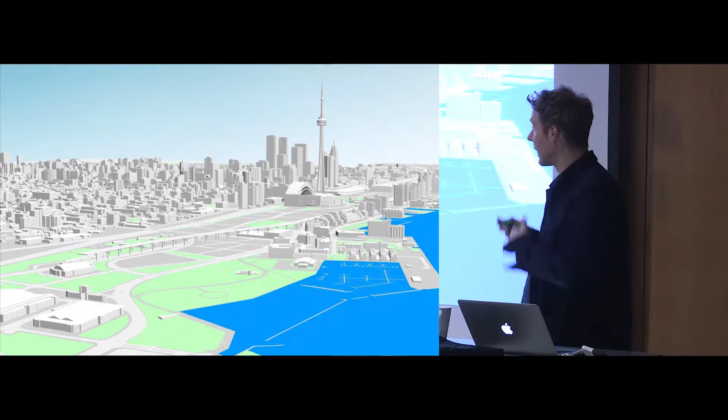In the last 20 years, we've seen the city move from a state that looked like this to a state that's more like this. And that's happened surprisingly fast. I never get tired of seeing that transformation. If you don't get to visit the city on a regular basis, it feels like that kind of shock sometimes.

So the question for someone interested in the public realm is to actually take stock of the city as it is today, now that we've achieved a relative verticality, and actually start to focus on the things just beyond this view - the incredible natural heritage and resource that is woven into the city fabric - and to start to really think about this idea of a city as a landscape, and what that means to recover that, or make connections to it at different scales.

That has been the kind of mission of Public Work. I'm going to go through a number of projects. The first one is actually one of our longest running projects in the office. It's still unbuilt, but it was our first project in 2012. It's at the mouth of Garrison Creek in Toronto. It is ready for tender, so I'm excited that one day it will be constructed.

On the left, you see this site at the shoreline of Lake Ontario and the mouth of Garrison Creek, right next to Fort York, about 300 or 200 years ago. On the right, you see the site as it is today, now with landfill moving about 400 meters from the lakefront. The site has this incredible sense of time, backwards and forwards, as it straddles a landscape that was on the left and the landscape that is emerging with the construction of condos in the City Place neighborhood.

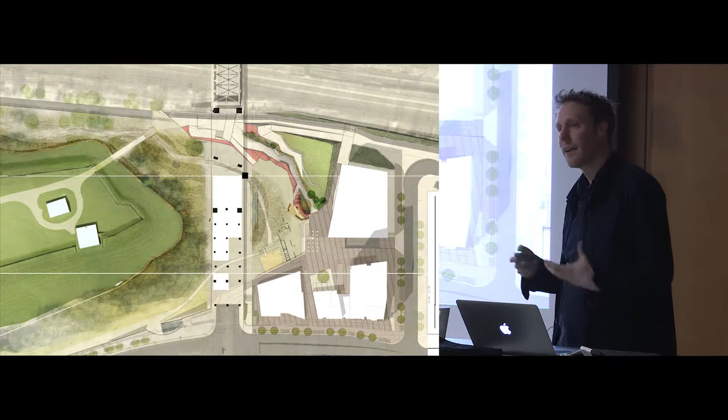But at this moment, in this public space, capturing the eastern side of Fort York, we put forward the idea of almost reestablishing the artifact of this geomorphological figure, taking quite seriously this sketch from Elizabeth Simcoe about that promontory embankment, and exploring new, ancient construction techniques in landscape and earth building — techniques that amidst the steel and glass of this condo development and vertical community, we lose touch with, a more tactile, earthen sense of the landscape.

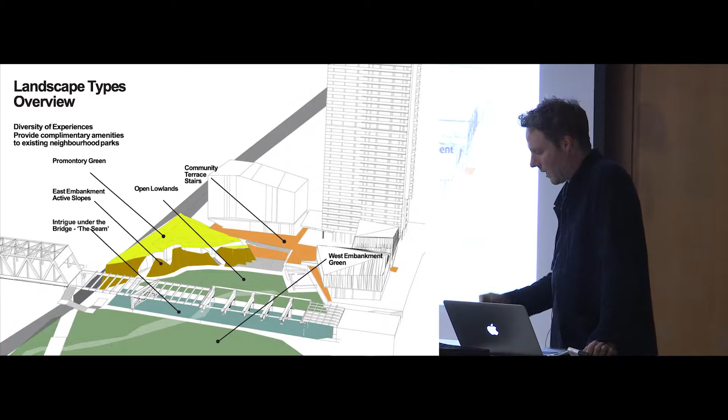So we're proposing a use of rammed earth, really trying to recover some of the textures of this creek ecology, and use stormwater management techniques in the lowlands area to reestablish that creek-like texture and atmosphere. This is a diagram of the site, showing the division of a lowlands, a middle cliff-like edge, and then a highland and promontory green on top that would offer unparalleled perspectives of the district.

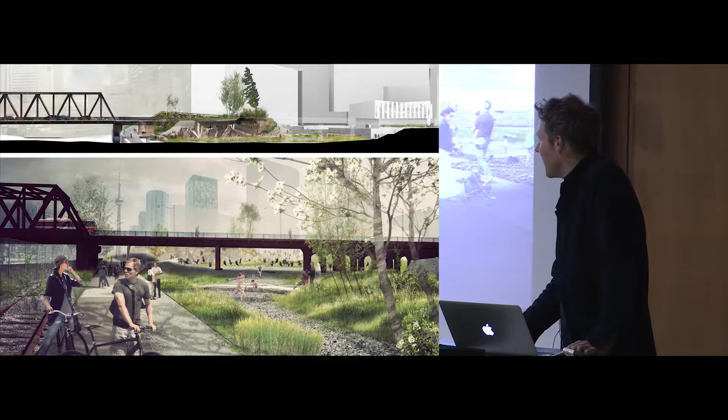Here's one of the images showing how the passage from the trails along the rail bank could allow the underside of the Bathurst Viaduct to become more hospitable, increasing the porosity between both sides of the fort. Ultimately this culminates in the upper green, giving a prospect over Bathurst back to the fort — creating a dialogue between this location, one of the reasons the fort was established here, and the fort and the remains of its heritage.

In 2013, we got involved with the University of Toronto faculty, the Daniels Faculty of Architecture, Landscape, and Design.

They were planning a move of the faculty to 1 Spadina Crescent, the former Knox College — a flat, circular roundabout space with this incredible jewel of a historic 19th century building. This building had been abandoned and disused for a number of years, but had gone through many progressions of uses. The idea was to reestablish all faculties, including the School of Visual Arts, in this new building, and the architects were Nader Tehrani's firm, NADAAA.

Situating that Spadina Circle in the historic context of Toronto's fabric, it's really one of the few exceptions to the rule of the grid — a very interesting break in that morphology of the city. That and Queen's Park are the two really poignant ones.

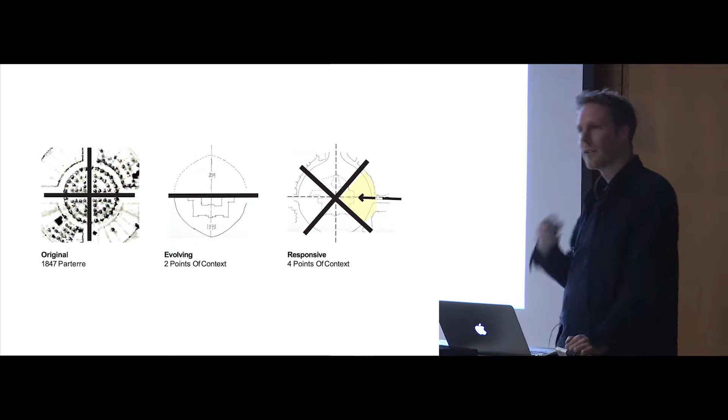We looked at the evolution of that site, originally as a landscape in the mid 19th century before the construction of Knox College, with this very axial break of the parterres, and how it emerged through deterioration into a single-sided orientation.

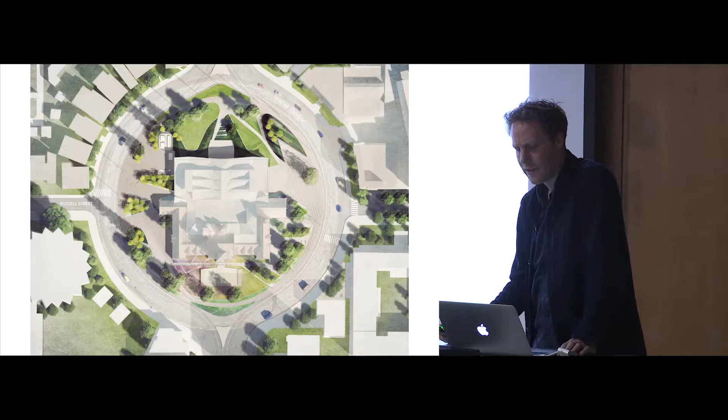The idea of the building and the situation of the new extension was to allow that to be more responsive in four directions. So this was the plan, which has been really interesting to see evolve — from an illustrative plan through the detailing, and now this aerial image showing the strong figure of these islands that galvanize around the old historic building, break through the transitions, and reestablish with more topography towards the north. So here's the sort of figure.

This is the eastern side of the project, which is actually the front door, oriented to Russell Street, one of the key axis spines towards the center of U of T. Opening a front door to the east, a gateway to the campus in that direction, was key. That's also the location of the plaza and the focal point of gathering, without giving up on the more neighborhood-focused entrance on the other side of Russell, the formal historic south, and the more dramatic and contemporary northern facade.

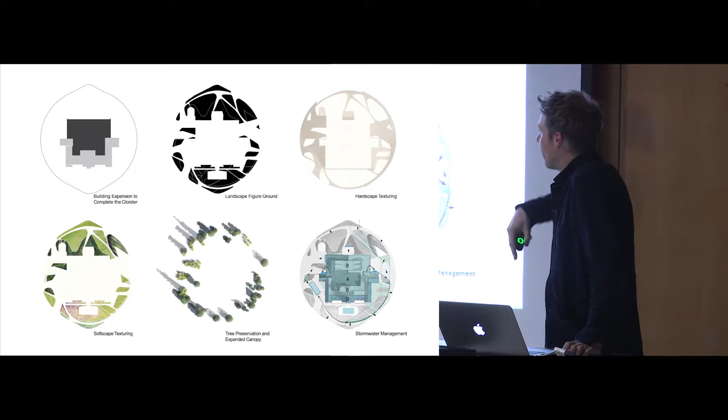So each axis has its own personality, respectful of the heritage, but also evolving around this circle, because the circle is always seen in movement, which is really the dynamic aspect of it. And that figure ground we establish with these parterres is heavily influenced by topography.

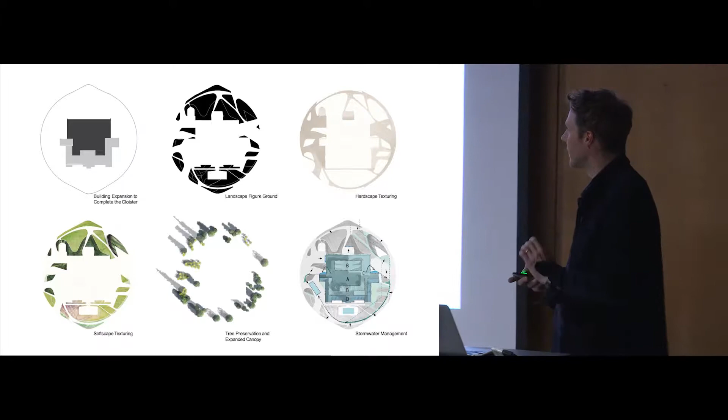That south view now presents itself very formally with native grasses, this idea of reintroducing nature into the city but in a respectful way, tuned to the pastoral moment and these quiet contemplative moments. The preservation of heritage trees was really critical, and then bringing in this influx of new textures in planting.

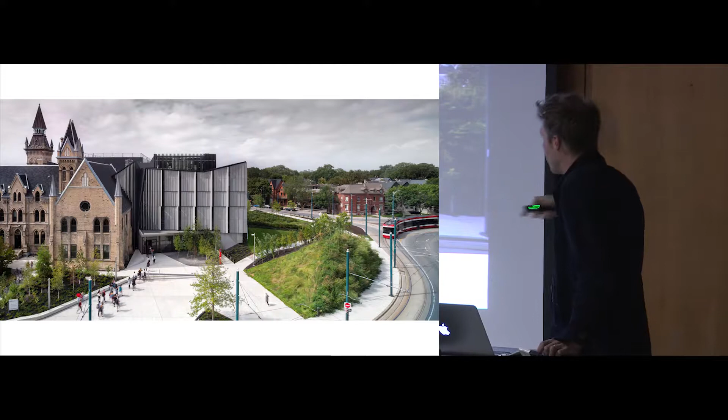As you weave around the circle, so to speak, you come to that entry court, and then the introduction of much more inflected topography, reaching a climax as you come around this moment where the streetcar comes, and the most dramatic landform almost sets itself off with the edge of the most dramatic point of the building.

We call this landform Darwin's Hill. It's almost an exception to the rule of these very sculpted and tailored landforms in a very controlled building, in a spirit of almost letting the landscape loosen up a little bit.

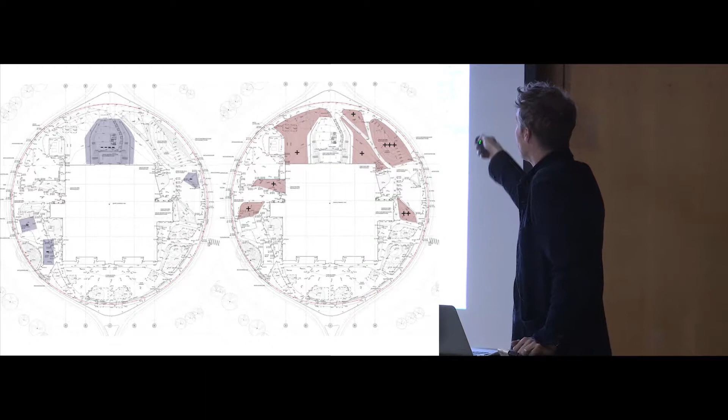This area is actually a very dramatic constructed landform. It's constructed out of the negative soil repository of the cut to create a sunken terrace on the north side, demonstrating this subtraction and then addition — this digging out is a way to start to allow the whole northern part of the circle to take on a much livelier, expressive, and sculptural feel.

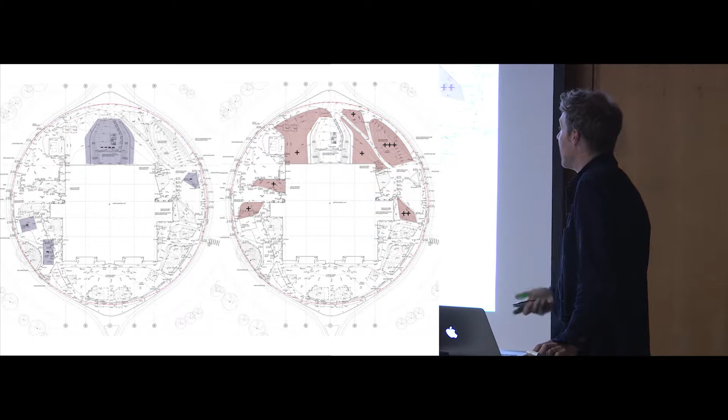That's an interesting action because it starts to make a completely flat landscape feel a little bit bigger than it actually is, in a strange way. It has that perception of becoming a more complex landscape on a relatively small, basically one-acre site.

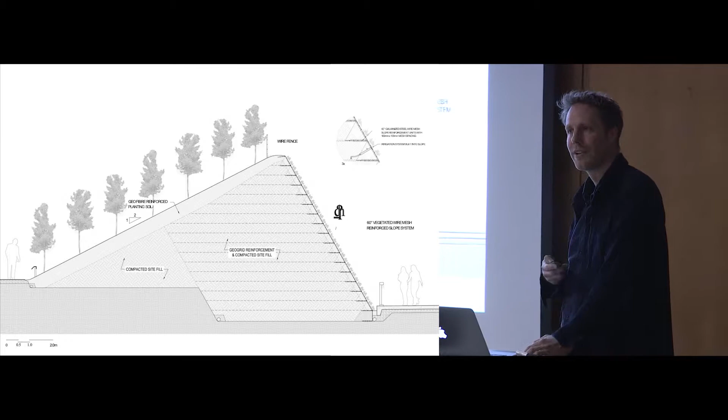The construction of Darwin's Hill was interesting. It also allows a chance to expose different forms of construction as a pedagogical tool — the construction of varied degreed slopes and stabilization methods of forming those slopes, and of course borrowing from mechanically stabilized earth techniques common more in engineering practices, to allow those to be visible.

That's the construction of the layering of this 5.5 meter high landform. You start to see in construction that south-facing slope that would face the plaza become the lawn, the sun lawn.

And on each side of this landform, we were able to set forward the beginnings of some pedagogical experiments in landscape that the faculty would be involved in being custodians of. The first one was simply a taxonomy of the City of Toronto's native and approved trees for naturalization.

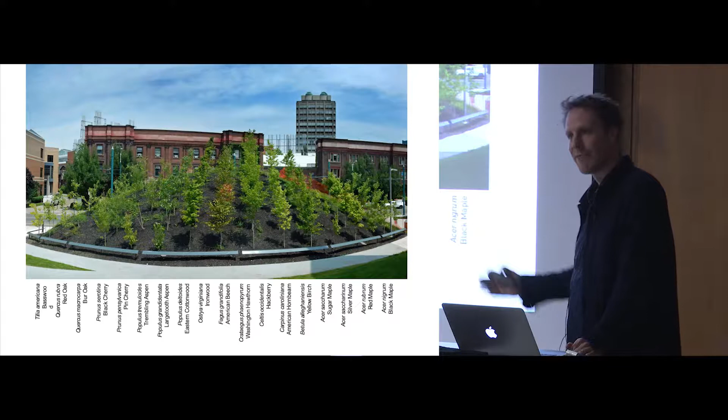So that's A to Q of trees, and they face the studios — interesting for landscape students to be surrounded by this. Your campus becomes much more lush. The U of T campus, very central in the city, landscape students don't have the same access to actually looking at trees in the same way, to see them through their growth, their various periods of growth. It's nice to think of a student who might spend three years at the faculty, able to observe these various species in different moments, following their form and habit as they go.

And then the south side is really the lawn, which we've been experimenting with mowing and not mowing.

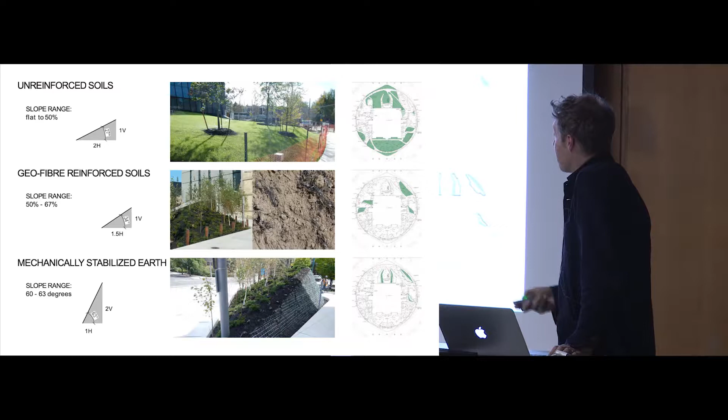And the kind of regime is being established for how that maintenance practice will take on. We've had a lot of fun thinking about how this landscape is maintained, especially at Darwin's Hill, allowing natural processes to unfold a little more openly, without the strict maintenance practices of the university. Across the site, you can see various methods of reinforcing soils at different slopes.

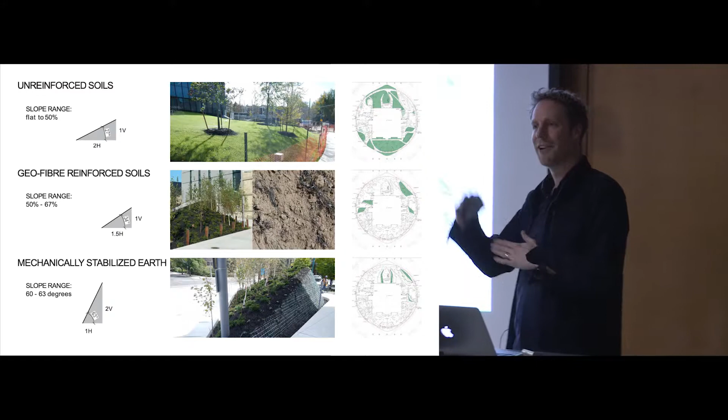Slopes are designed in very clear and concise ways, so there's a kind of tour you can take around the circle, catching about every standard slope you need. If you're working on a project, you can see a 3-to-1, a 2-to-1, a 1.5-to-1, a 1-to-1 — sometimes a nice measure to really understand spatial conditions.

Actually, we were doing some tests seeding some stock of Vinca, just to see how they would take. We were doing some bare root plantings and various tests that were interesting, to see what densities we could establish on these steep, mechanically stabilized slopes.

Here's moving around again to the west entrance. This is more the community side, the library, and the more contemplative side. This is where yews and birches become filter landscapes on either entrance.

The scoring of the concrete — because of the budget, the paving was really poured-in-place concrete, but to give it more life and quality, so it didn't feel like the rest of the concrete city that surrounds it, we employed a scoring technique inspired by some of Sol LeWitt's drawings — this kind of etched, very careful overlapping line work.

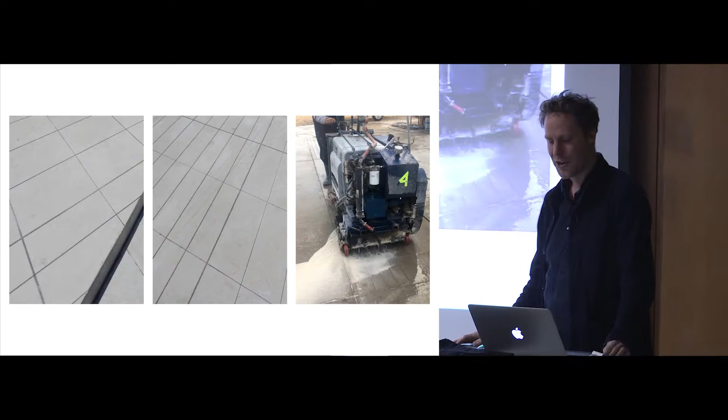And we discovered that amazingly, in Guelph, Ontario, there's a North American leader in scoring, but this technique isn't usually employed in public space projects. It's usually used for barns — it helps prevent cattle from slipping.

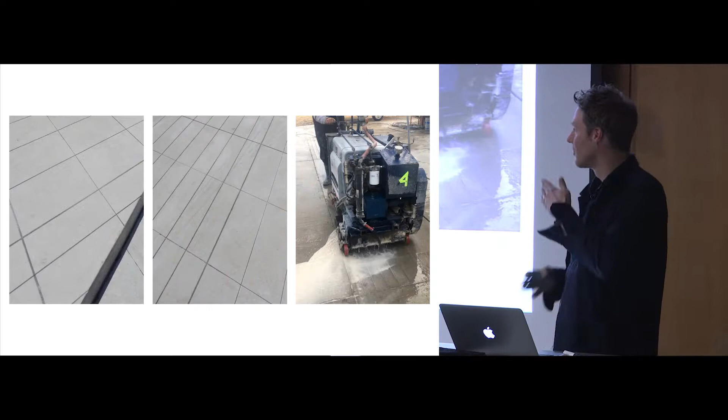So an amazing guy named Vern, who is in high demand on Texas ranches, came to U of T to do these amazing incisions in conjunction with control joints and expansion joints, creating this kind of varied density across the ground plane.

It reestablishes new relations to its edges, and the landscape continues to evolve. The faculty continues to play a central role in how it's managed and how it will be a source of experimentation going forward.

In 2014, we were really lucky to get involved in a project of very high density — two new office towers by Wilkinson Eyre Architects. And they had the idea of bridging these two towers with a park.

That bridge, or platform, connecting these two projects allowed the project to work in phases — while the first building was built and occupied, the second was a sort of staging ground for building the second one on a very tight plot of land.

But I guess one of the other really strong purposes of the landscape was to redefine what it meant to extend the quality of downtown's office addresses south of the tracks past Union Station. In some ways it was really about how that financial district, which is fairly underserved in terms of green space, would begin to have a green address.

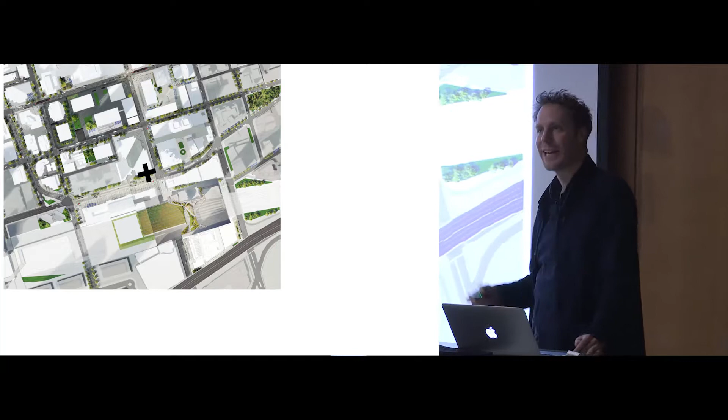And that was really important, I think, because the general center of Toronto's business address has always been King and Bay. And at King and Bay, that's where Mies created one of his iconic TD Towers.

And it's a real question of how you start to move that energy southward, south of Front to this address, and then even further south of the tracks to this address.

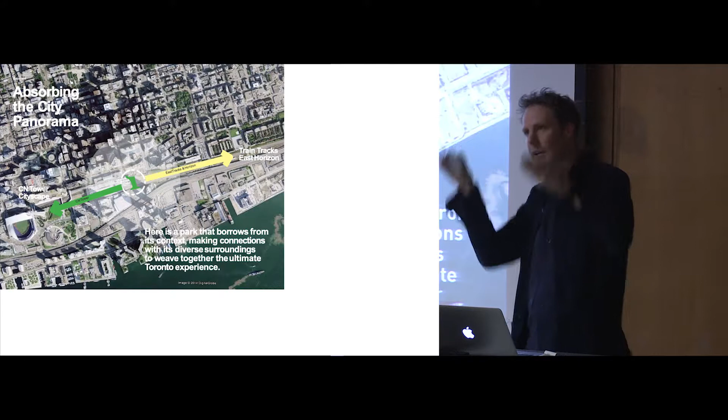Part of the theory, or the principle, or what we started to work with, was to create a kind of corporate environment that would be completely different from that of King and Bay—basically the opposite—and to focus on the disconnect from the ground plane and city level by necessity, because this park was 5 stories above street level. It could actually absorb an unprecedented kind of panorama and access to skyline views, and it could be materialized in a way that was nothing like the granite ground plane of the financial district traditionally.

So as you enter the park, from either vantage point, you meet a garden, and then you're drawn into the central green.

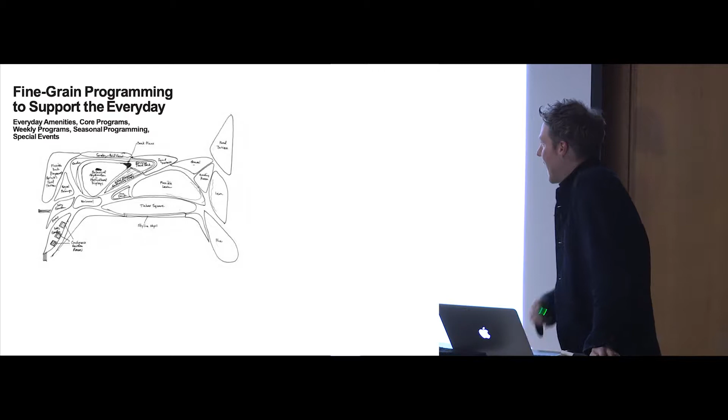Part of that was driven by an idea about a park 5 levels off of the city ground, and what it would mean to activate it, not just for office users, but how it could play a role in more daily life. That's a real challenge at 5 levels above street level.

We worked also with the advisors who work on Bryant Park in New York City, who have become adept at programming public realm spaces. They were part of the discussion and dialogue with the client team about how you create a central zone that could accommodate almost anything, with the ability to keep programming and activating the edges.

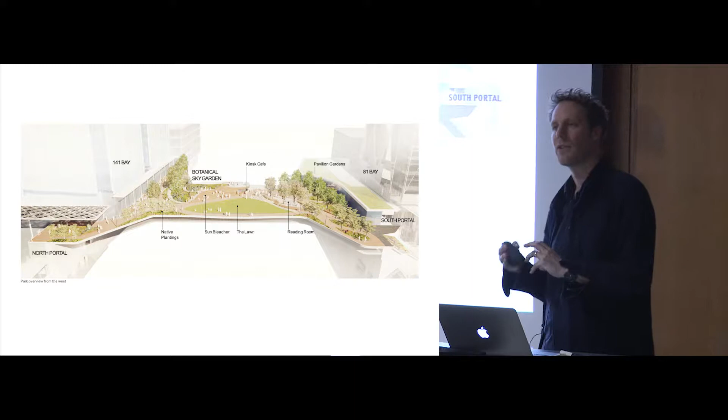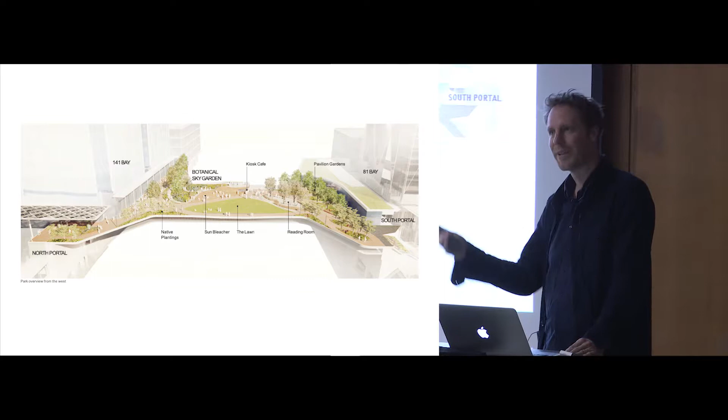What was interesting in the conversation from us as landscape architects was to work at the nuances of those assumptions about flatness being the default for infinite programming, but to actually recognize that a landscape didn't have to deter flexibility in terms of programming—so tree planting didn't have to mean you couldn't still have a farmer's market, or that you couldn't think about animation in an environment that could still have character from the point of view of a landscape.

That meant also really having a lot of discussions about topography, and that placemaking and programming are things that actually have to work together.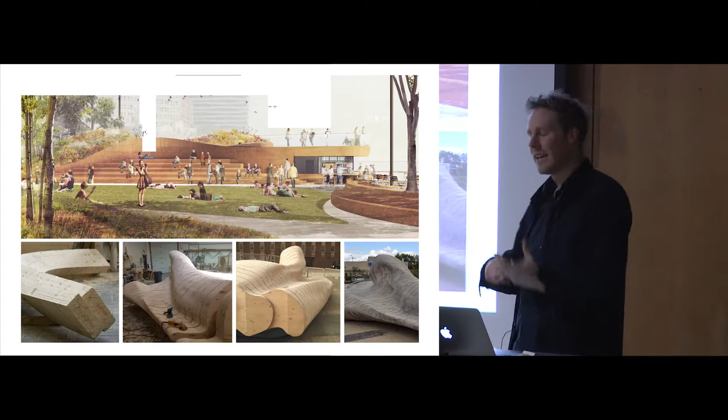The use of wood and timber was really important for us in counteracting the glass and steel nature of so much of this area, letting it feel like a place where you might want to take your shoes off.

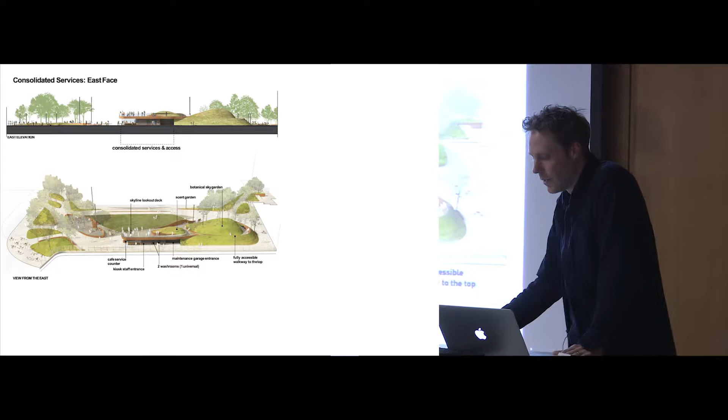And so the sculptural timber detailing of this bleacher that would face the lawn. This bleacher actually started to turn into more than just a landform and a source for the garden—it also became a kind of functional building, and it evolved into this approach to topography.

Underneath this particular hill, the landform has found its raison d'être, from the point of view of the clients, especially by housing a kiosk that could serve food and beverage, washrooms for the park, a mechanical room, storage, and a garage for the Zamboni. I'll get to the skating program in a moment.

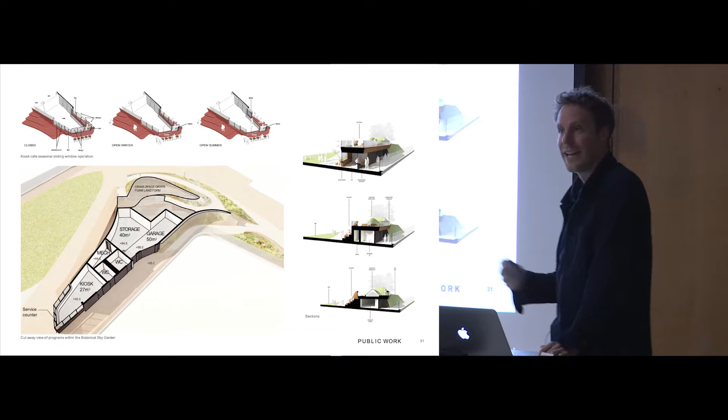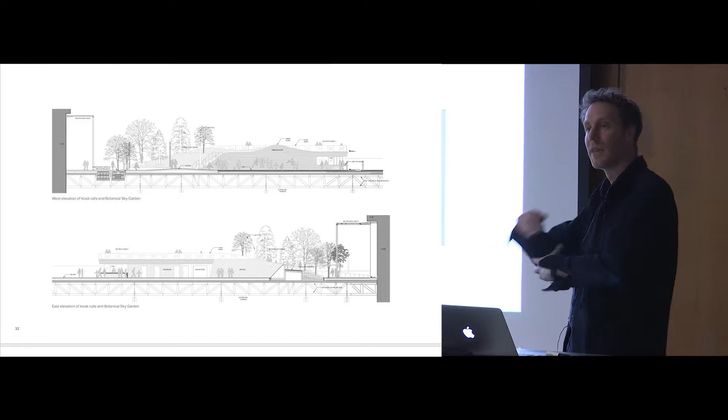Interesting from the point of view of landscape architects working on a park—it evolved into actually designing a landform that eventually became a building. And so that building is almost completely disguised as one of the sweeps of this kind of botanical drift.

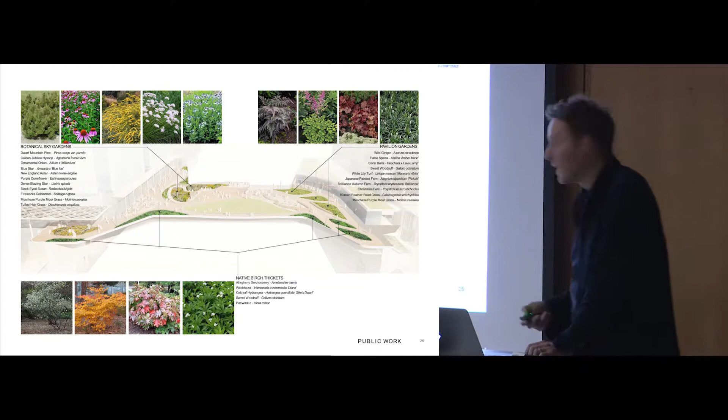In terms of the species mix, we used more deciduous trees with diverse seasonal color framing the transition to the buildings, with thickets of native birch coming around the front. These are ideas about gardens that promote biodiversity and pollination—this image of a sweep of green that moves through the park.

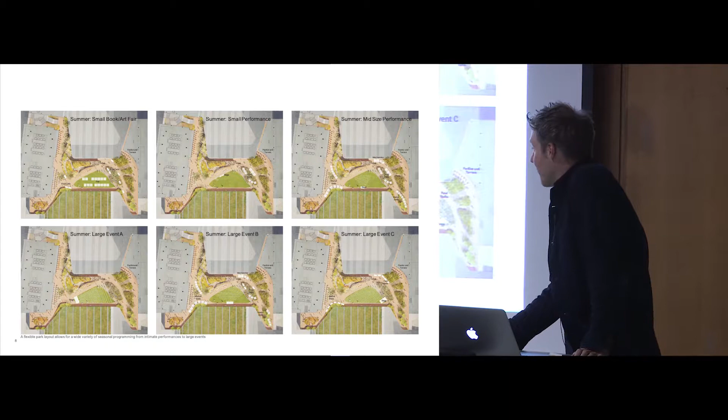So a few more views. And again, that idea of programming—this plan had to be tested for an infinite number of scenarios of how this could be occupied, both by office users and by the programming they anticipated to keep this place pulsing. It's right across from Scotiabank Arena, so they saw it as a place that would have heavy event action.

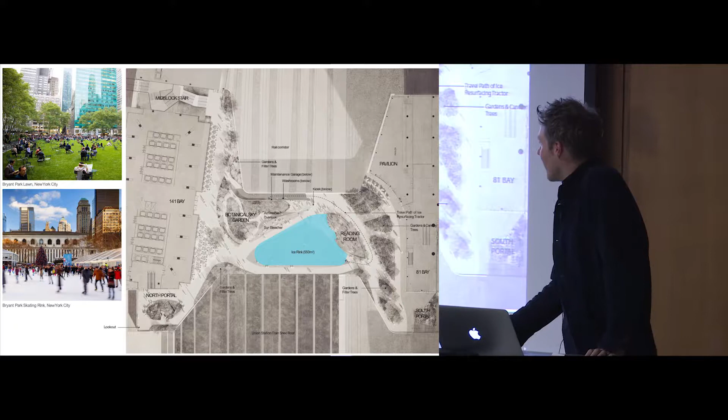And it accommodates an ice rink seasonally at its core, which is another reason for the facility here to store the Zamboni. Okay, I'm going to keep moving to 2015. This was an exciting year.

This was when we had the amazing opportunity to engage in this kind of fantasy about how our remnant infrastructure of the 20th century could take new life in the public realm, which becomes, particularly in Toronto, a hot topic as we reached a certain tipping point in density. There's now a more commonly held understanding of feeling like we're lacking our connection to green space and public space, and it's become central in public discourse. This project's been a great stimulus for that discussion.

We were really thrilled to be invited by urban designer Ken Greenberg to explore what it could mean to think about a public space under this artery. One of the principal ideas was really about working under this roof, but also working with this structure, and that was something really important to us.

Without a doubt, its placement strategically in the midst of 7 neighborhoods that hadn't really galvanized as one. The structure sort of swerves through neighborhoods, some established and extremely historic, others completely new, but housing a huge population of people without really a strong sense of a community gathering place.

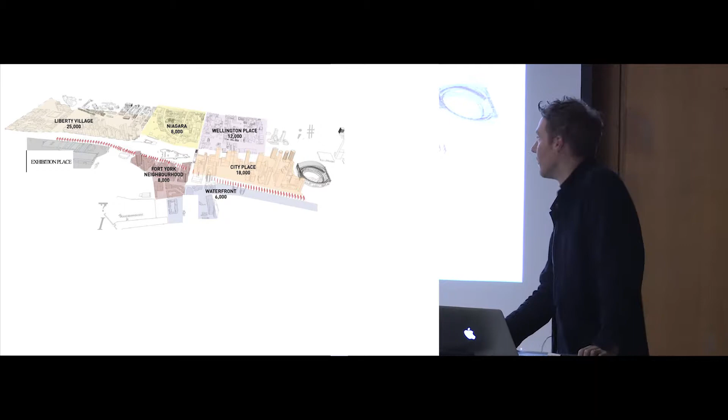So it began through an idea of connectivity, but it evolved to an idea of place and a particular kind of activation very different from the traditional parks of the city, that could be an antidote to supplement the traditional spaces you might have in various parts, whether it's a historic commons of the fort, the more traditional community parks, or the waterfront parks that have been emerging.

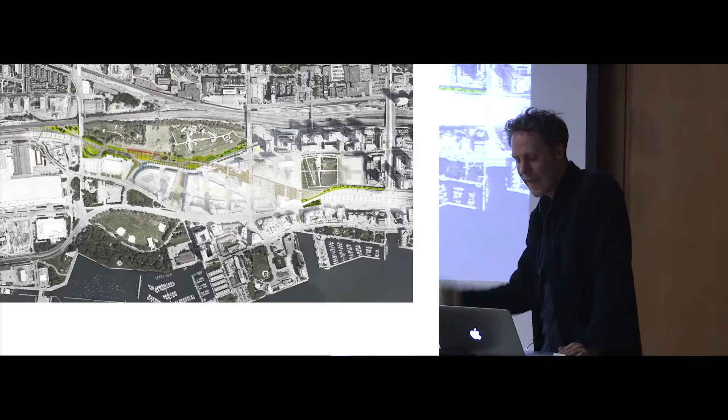The Bentway became an idea about an alternate kind of space that was really more about expressing a kind of creative arts and the diversity of culture that Toronto doesn't always have a home for.

In looking at this space, it's one of those spaces where its rawness is what makes you fall in love with it. These amazing shots of it under construction reveal its kind of anatomy of these columns, which are called bents as an engineering term. Immediately from this view, you almost get a sense of that anatomy, and the idea of rooms emerged.

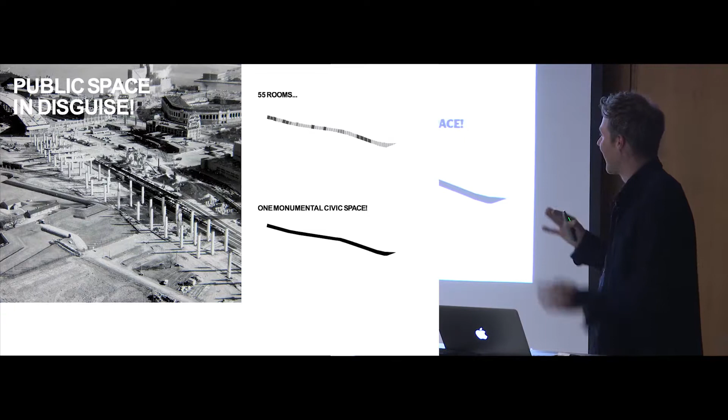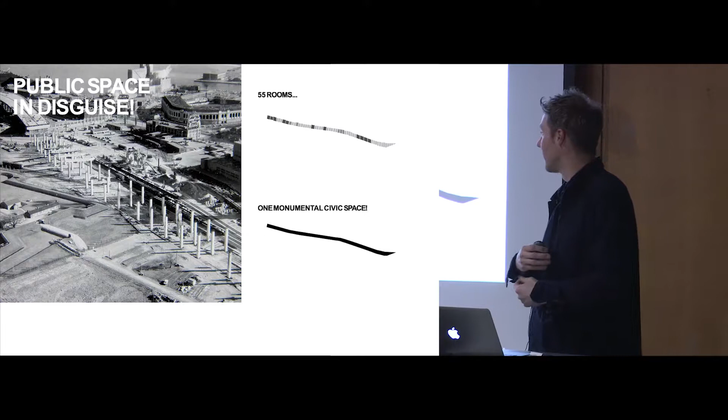What was really exciting is that within this phase of the project, you could think of this as a collection of 55 individual rooms, or on the other hand, as a nearly 2-kilometer space like no other in the city. That ability to oscillate between feeling like an aggregation of many small things, or on the other hand these big sweeps, was really exciting, and that elasticity of the space was something we really didn't want to lose.

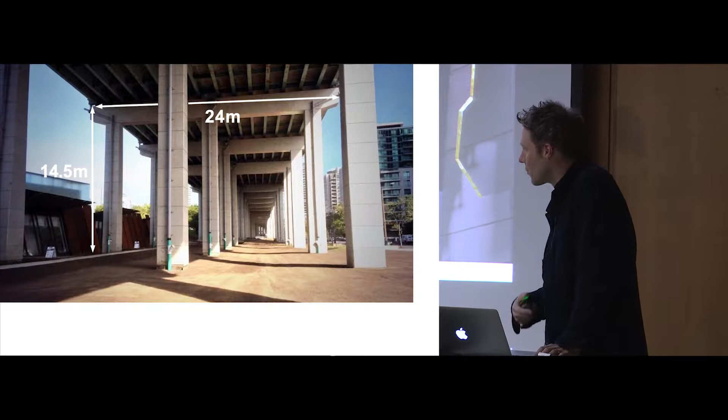I think our approach to thinking about what to do with this, or how to take this place a step further, was really about how we could be true to almost what we had found, and to amplify those qualities when you visited it often and saw it — the quality of light, the majestic nature of the scale, and the rawness and brutalness of its materials.

So the palette of both green and hardscape emerged as a kind of woven strategy, where vegetation was really about pioneering, spontaneous, and a little bit wild, while materials were aiming to be warm from this abundance of concrete, to find a sense of warmth. We also tried to avoid the instant feeling of newness, to bring a soul to the place.

There was a kind of patina about some of the structure that actually had a real beauty. It was our intuition that working with more recycled materials would be a sustainable thing to do, but could also bring a kind of character and identity to the place.

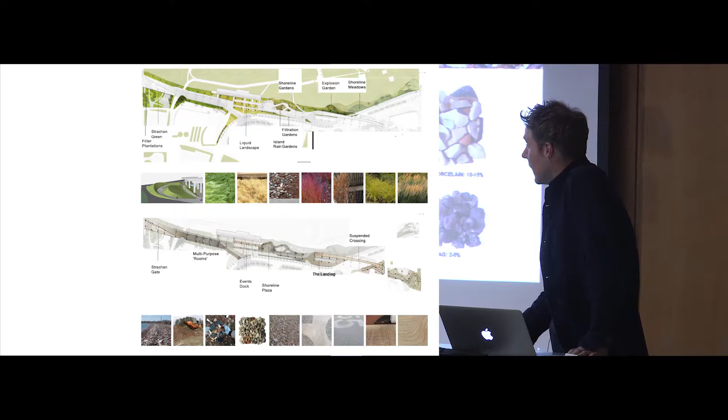So we had the good fortune of being able to work with the Toronto and Region Conservation Authority to harvest some of the materials from Tommy Thompson Spit, which is one of the most amazing landscapes in Toronto, if you ever have a chance to visit. This is basically the detritus of cities, the last 100 years of cities' construction debris, being eroded and washed on the shoreline.

We were able to capture one of the last loads of dumping at the Spit before it went to the beach, sift through it, and create our own Bentway mixes, using them as aggregate in the concrete on site. So in various ways, the legacy of the city is built into the new project.

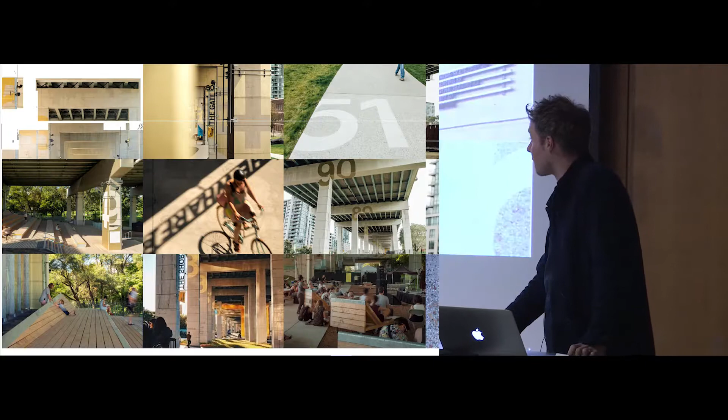That quality of light was one of the really interesting topics working with our lighting designer, Linnea Tillett. It wasn't just about the quality of light at night, which many lighting designers talk about, but rather the quality of light by day, and the reflectivity of the place.

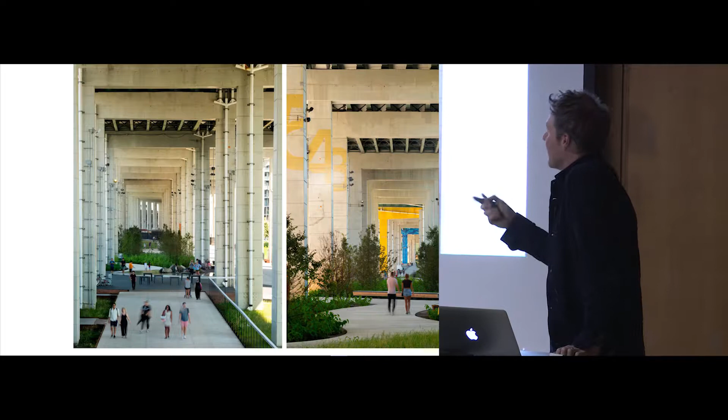One of the most important moves we made was to add, very selectively, a kind of gold paint across some of the bents to amplify that amazing light, especially the setting sun at the end of the day. The other thing was, in all of our materialization, to use galvanized metal to create coherence, but also for its reflectivity, its simplicity, and to disguise old and new, and the utility of certain infrastructure along with additions like signage and rigging.

So here's a view of the first phase, completed last summer. Really, the theory and principle behind the project was not just about the design of the environment, but rather how we could support life in this environment—designing the kind of equipment to allow things to happen in a place. In some ways, that's how we conceptualized the various components of the place, based on their proximity to stable neighborhoods or proximity to rail and noisier conditions, to create these three kinds of districts in the plan.

What we've seen has been really exciting—the life of the place has been fueled by really diverse community programming. It feels like it's renewing itself on a regular basis.

The materialization of some of these places is very pioneering in its finish. The furniture is really robust and chunky, and it allows almost the minimum to allow things to happen and for other people's imagination to do more.

There's a principle about really thinking about multifunctionality, but not necessarily revealing what it becomes. In some months it's a trail, a sort of multi-purpose trail, and then in winter that becomes the skating rink. But the edges are designed so it doesn't look like a sad skating rink in the summer. That kind of blending has been one of the focuses of design.

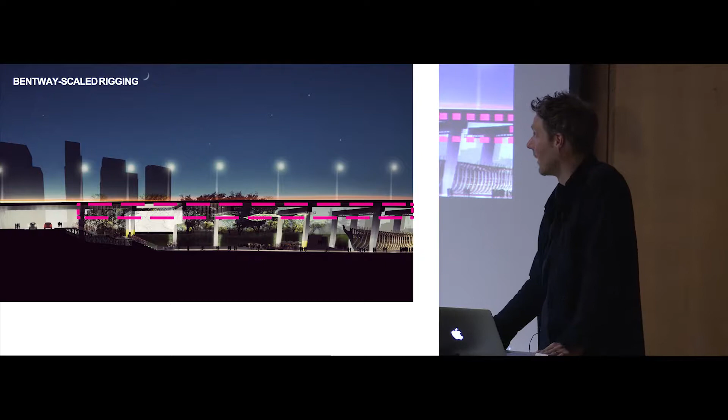It's an idea about how you can harness the amazing opportunity of having a roof at a scale you'd never have in any other park—thinking of that underside as hosting a scale of rigging we never imagined. So, working with our structural engineers at Blackwell, we thought about how a rigging system could be suspended from those columns in an appropriate way, to allow visual artists to install different three-dimensional works, and also to support canopies, screens, and various things.

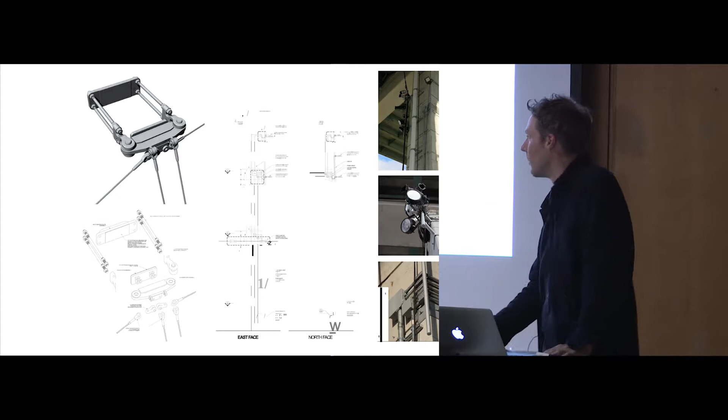So there's a whole set of detailing around the columns to allow things to be attached and rigged in, almost the way you'd approach a theatrical design.

So here's a view of Strachan Gate, and in the rendering underneath that we have a community room, washrooms, more storage, and a green room for performers. Here's a view of that top—the top is a deck that allows you to descend from Strachan Avenue into the project.

These sort of baffle walls pivot—they have art installations on one side, and they mute sound a bit from the street when it's in performance mode. Some of the new trails lead into the project.

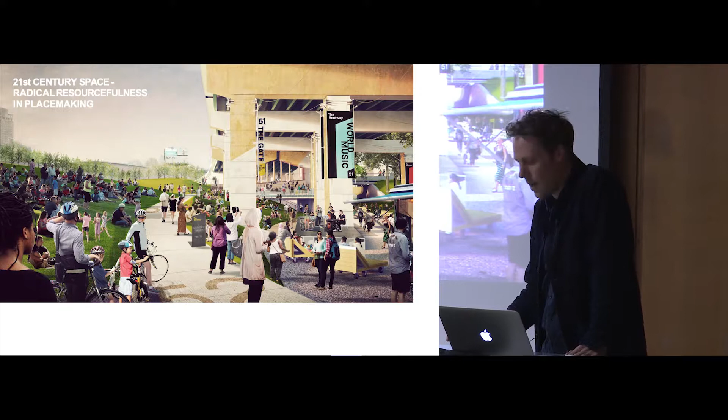What's interesting is how simple the project really is. It's almost trying to do the least to allow it to take on a life of its own. That's an interesting theme as we reuse infrastructure from the last century and find new life for it.

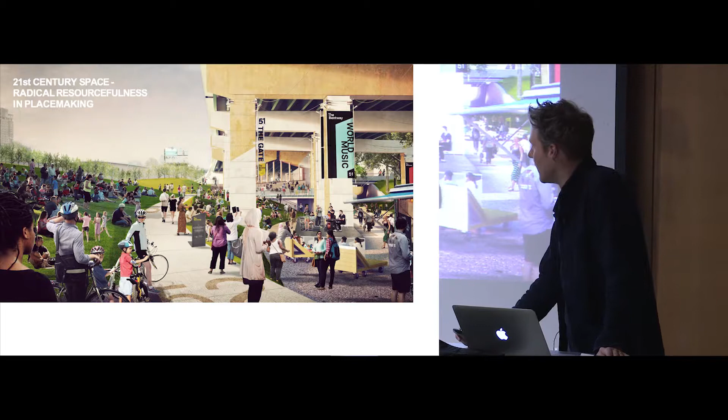The other remarkable thing about the project is its funding—the unprecedented gift of $25 million from Will and Judy Matthews, whose generosity allowed the Bentway to happen, both for the capital investment of building what I just showed you, and for seeding the Bentway Conservancy, based on a model similar to the New York Central Park Conservancy, more common in the US—an independent body that can maintain and activate the space continually.

This is in collaboration with the City of Toronto. It's an amazing story, and what the Bentway Conservancy does now is act as custodians of the place, setting up events and activities, engaging the community, and bringing in visual artists from around the world. We saw an exciting installation this fall by Daan Roosegaarde, a light artist from the Netherlands—a chance to imagine how the space could continually be reinvented by others. In some ways, our role as designers was to be as discreet as possible, allowing the conditions for future things to happen.

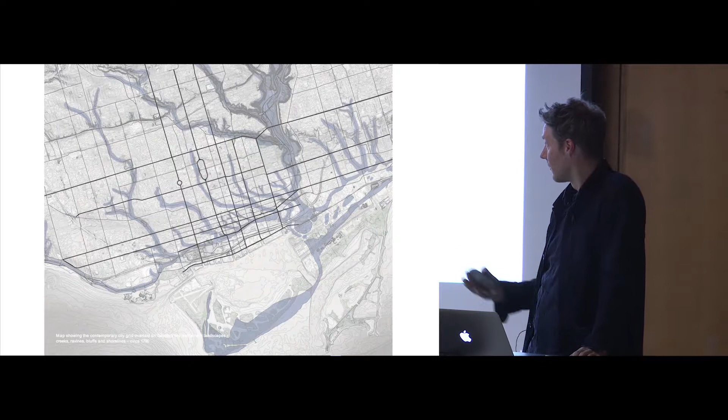In many ways a lot of those natural systems have disappeared, but if we look at almost an X-ray of the skeleton of some key open spaces, we start to see the formation of almost a ring—one that includes a collection of probably our most diverse landscapes and ecologies, including the Don River Valley to the east and the peninsula and sand-shifting islands to the south.

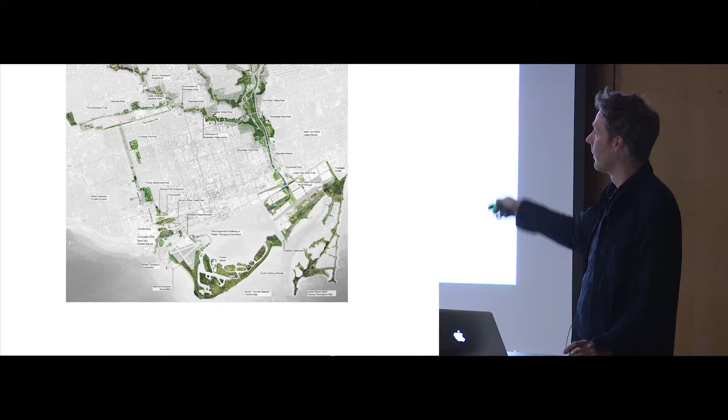This is the Garrison Creek corridor, which we talked about, mouth of the Creek Park, which is right there. And that lost creek that we could also recover, we promote being recovered through the linking of existing parks and new streetscapes. And then the northern line, which is really the geological trace of our city, former shores of Lake Iroquois, and really important from an indigenous perspective as a traveling route from 400 years ago.

Together, that's a collection of 900 hectares. In a conversation that shouldn't just be about quantity of open space, it really should be about quality. It's also interesting to remind ourselves that we are encircled by a size of green space that's 3 times Central Park. In some ways it's about shifting our imagination about what it means to live in the core and move outwards towards this landscape, and likewise to live beyond that and move towards this as a system around us.

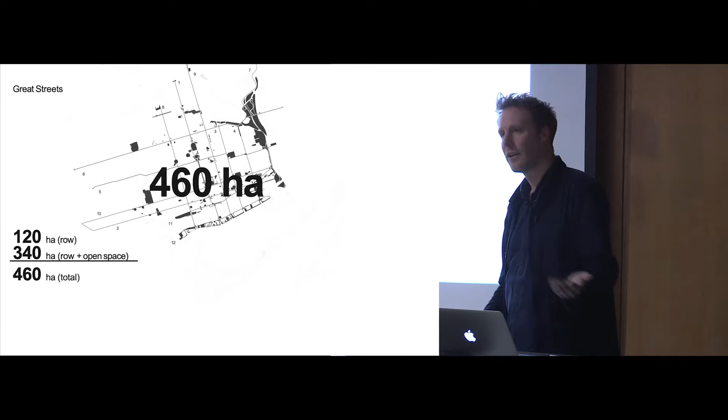Next sort of really key topic is streets. And streets are the next frontier really for rethinking public space design. Just looking at some of the key streets, the 12 key streets and the right-of-way, we have almost 500 hectares of terrain. So we did proposals for 12 of the city's most important streets.

I'll just quickly talk about one, because it's indicative of the philosophy of approaching them, and it's University Avenue in Toronto. This is what it was in its glory years towards the end of the 19th century. Here it is today. It is an important designed modern landscape, but at the same time, this kind of orphaned island in public life studies really did not perform well. As it sits, it's a 3-acre piece stranded between heavy traffic.

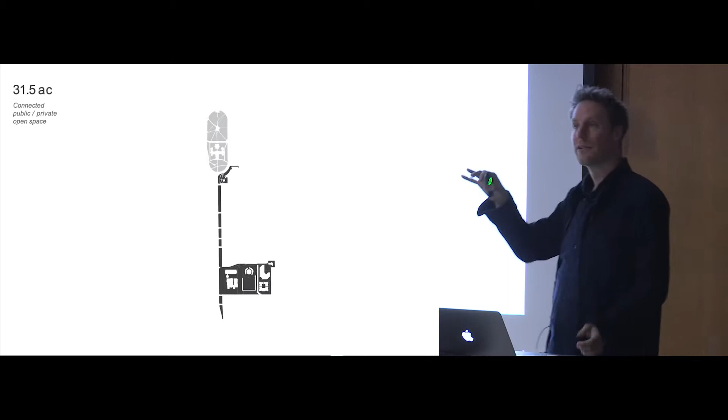We propose a reconfiguration and narrowing of lanes of traffic to expand that park and stitch it to the east side, to City Hall, Osgoode Hall, and the courts, and link it up to Queen's Park, and then into King's College Circle and U of T. You see the aggregation of area grows to over 30 acres. This is not a trick, it's simply thinking about our open space resources or our streets as connecting existing open spaces, and allowing them to work as a kind of assemblage of places.

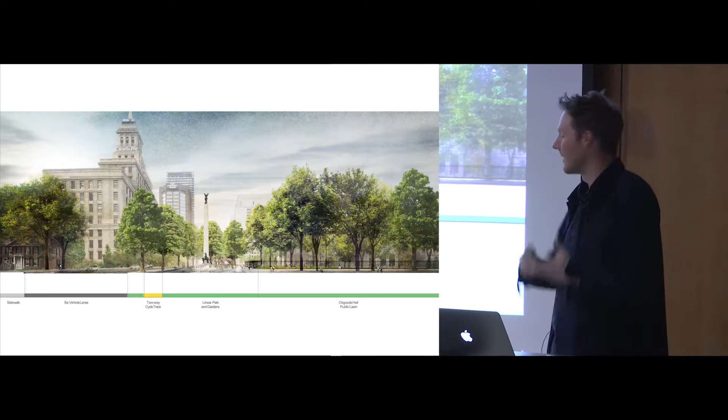So, yes, we create a street that feels like a 9-acre park, but what it unlocks is a system that's much more significant and allows a civic precinct around City Hall to move into this judicial thing all the way up to Queen's Park, where Queen's Park and the university suddenly are in dialogue.

That approach really could be taken, we've outlined about 20 different places where you could have that thinking. We call them park districts. It's not a great name, but it's passed by City Council and it's in the official plan. So it's a really exciting achievement, looking at things not as singular elements of the public realm, but actually as woven. That's a big step in thinking.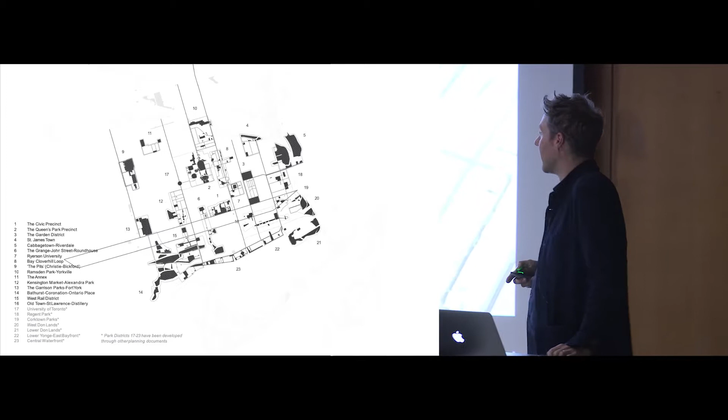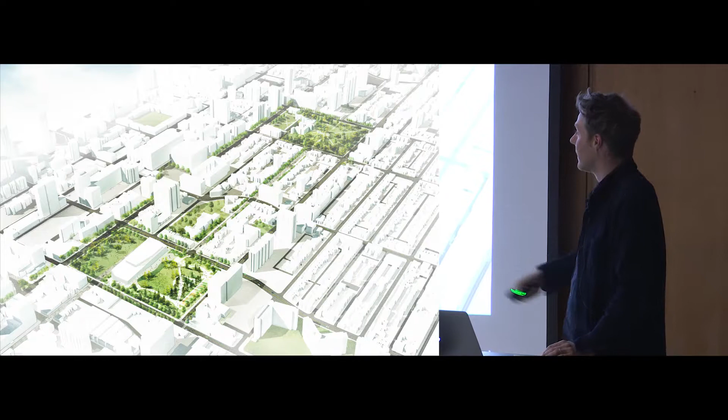There's all kinds of examples. This is in the Garden District, trying to bring it back to its glory. Maybe no one knows where the Garden District is, but that's Allen Gardens, if you know it. That's Moss Park, set to be transformed. There's a whole series of streets that can actually start to perform more like park streets as a typology, where your experience of the park doesn't have to end at the traditional boundaries of that space.

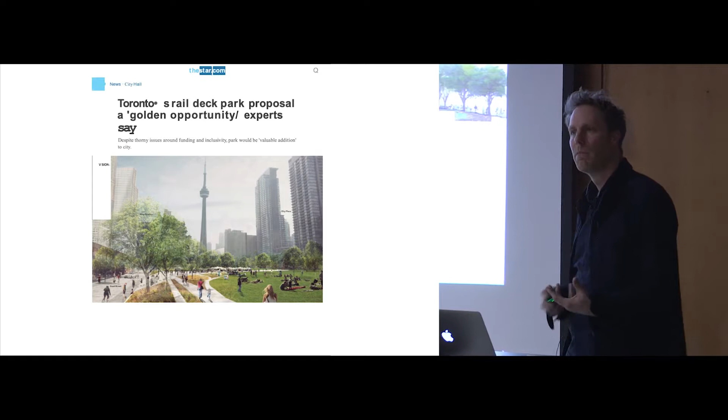Then there were a few parts of the planning study that sometimes generate more political interest, and they advance a conversation. One was Rail Deck Park, and this was probably one of the few moments maybe in downtown where we could actually create a large park, in a place that you normally couldn't build, and that's over the railway tracks.

So this is Bathurst Bridge. This is where the future Rail Deck Park will be. Really a once in a lifetime opportunity to make a 21-acre park. Again, it's not Central Park, but in the area to the north at King West, which is really one of the most dense districts in the country, it has a strong meaning.

I won't talk about the last scale, but that's one of the most interesting. It's like how a big city also can take on its small scales, the lanes, the little leftover interstitial spaces, and also think differently about schoolyards, churches, cemeteries, etc. That all starts to form a more nuanced strategy in a big book.

I don't think there's a lot of time to go on, and I have like 2 more years to cover. But I think I should stop.

This one I might just briefly cover. But this was a competition we did. A lot of people say that, right? I'm going to stop, but I'm not going to keep talking.

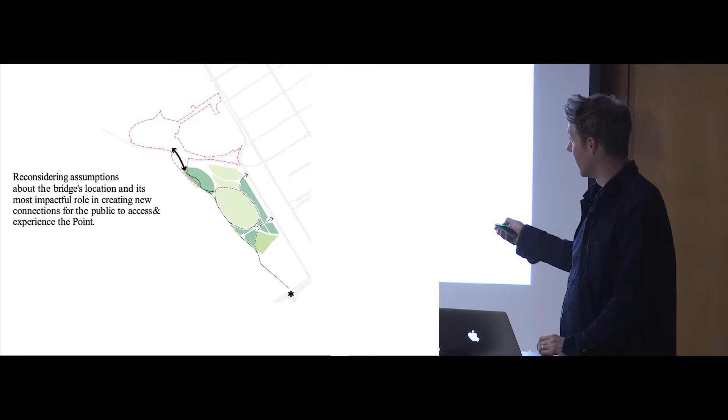So our proposal really was reframing some slightly different ambitions for the project, but trying to take on the challenges that the brief also put out. One of those was to transform the way you get to Nepean Point. The brief had a preconception that it should all come from Majors Hill Park through a bridge. We didn't think that created the most drama for a sense of arrival, nor did it express the real relationship of this point to its source, the river.

We discovered there was in fact a lower route, used a little by joggers, that didn't go up to the point but nevertheless covered part of that path. So we started to think of the route to Nepean Point having an alternate approach from the locks, along the Rideau Locks, and then up along the escarpment.

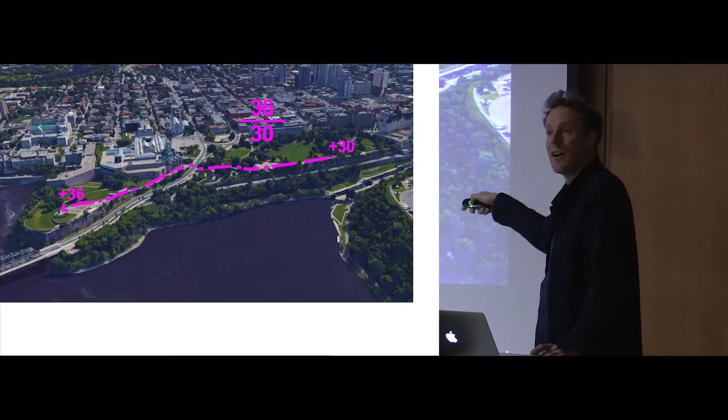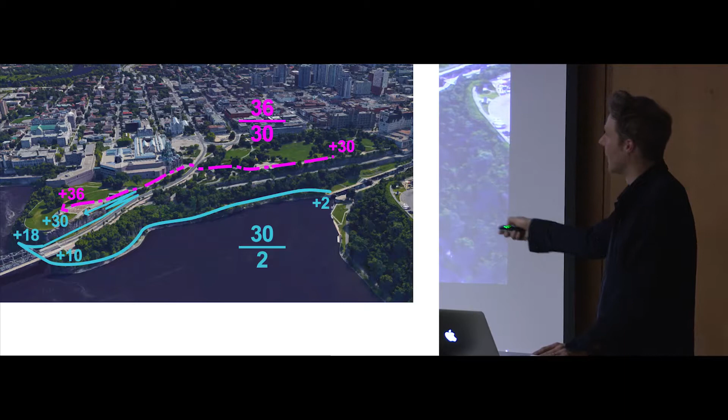So to think of the route being in sort of 19th century Ottawa, moving down to the river, which is the source for the region, climbing up, and rather than the drama of climbing 6 meters and having the same vista all the way along, opening up a much more dramatic route that's very immersive in contact with the water, then rises dramatically up and around, giving a much more holistic understanding of that approach.

So to think of the bridge not as crossing the street like the competition had outlined, but rather following the river and making its way up in a serpentine way along the escarpment, in close contact with this exposed limestone, a bridge that would pin itself into the rock foundations and then weave up to the top.

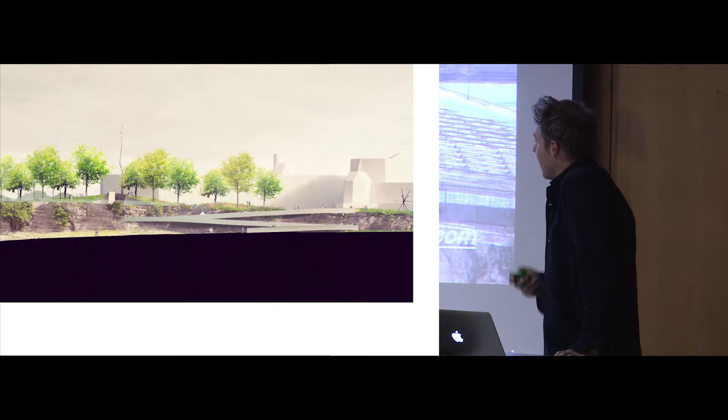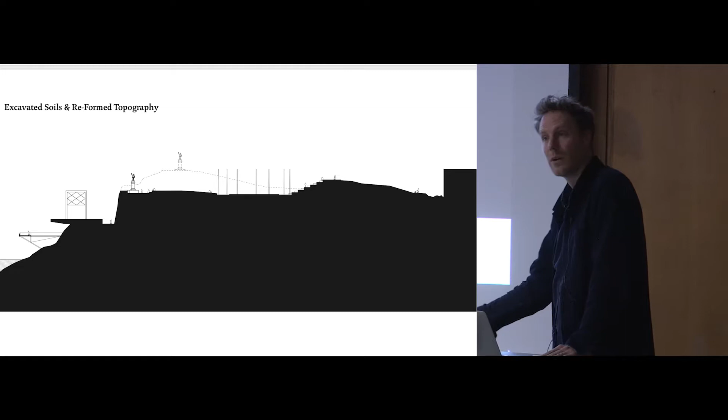Then handling this very sensitive situation with Samuel Champlain, we pursued an idea that, because of the contaminated fill found here from environmental studies and the asbestos in this little washroom building, proposed a complete excavation of the site down to bedrock, which was actually quite shallow when you looked at the boreholes. In some ways this makes a literal break from the line of 19th century picturesque park landscapes from Major's Hill up, defining and reclaiming the riverfront and edge as almost the beginning of a source landscape from bedrock.

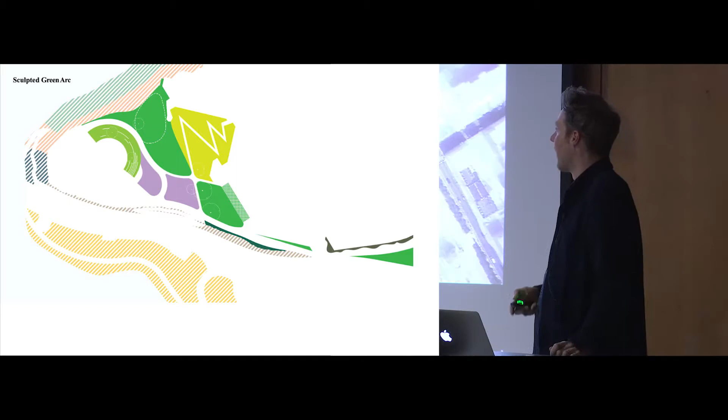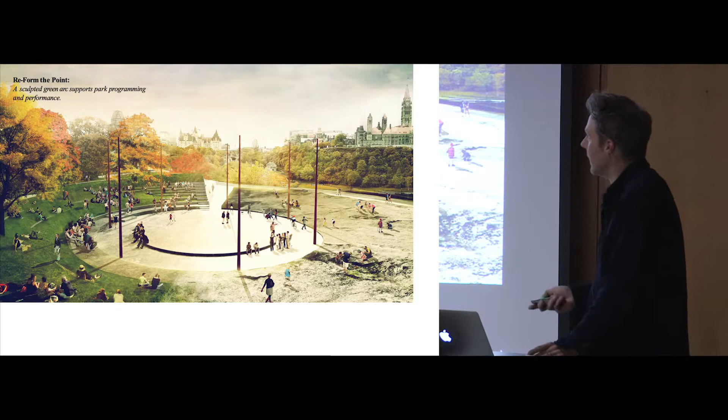Then allowing that to just expose the fabric of the limestone, creating in some ways half a park, with the other half as grounds for a whole different process of park making that had nothing to do with the NCC or us, but was really an open-ended idea of how over time the breakdown of mineral, the formation of nutrient-rich soil, and slowly the cultivation of life could occur.

We were moved both by Cornelia Oberlander's Taiga Garden in the National Gallery right next door, and also Nicholas Galen, an indigenous artist's installation carved into some of the bedrock, and how that is already giving life to new growth. We imagined a whole different approach to custodianship and interaction with the bedrock could be created by participants shaping this landform, allowing it to evolve over time. A key part of that is putting custodianship back with the Algonquin Nation in collaboration with partners from education, the National Gallery, and other community organizations, to allow this to unfold.

Symbolically and importantly, we moved Samuel Champlain to the edge, still with a great view of the river and the Parliament, but not as the central figure, still honoring that dialogue and those narratives, but putting them in balance.

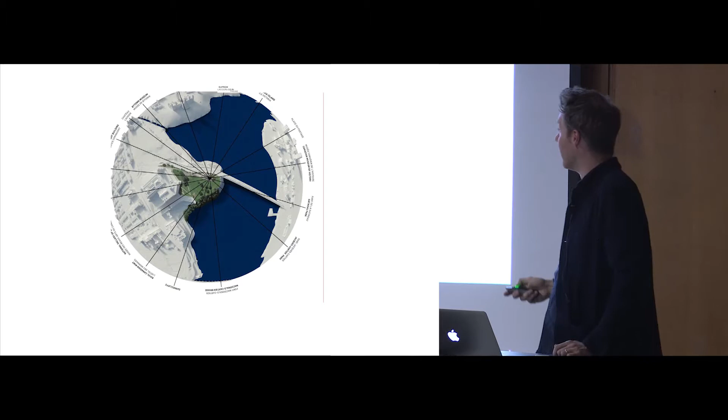In the previous condition, he was on the highest ground, the one central spot everyone went to survey the land. In the new park, this point opens up as actually a piece of the riverscape, which is really at the core of Ottawa and the nation. As a counter to the Confederation Boulevard circuit at the highland benchmark, it would create a new river route following the shoreline, where this place would be the climax of those two, an intersection of both.

So the challenge, of course, was representing this idea — that's really a challenge. It's partly the challenge of landscape: how to express time, how to express process and change over time, and to look at an image like this and say that this isn't a final image. This isn't actually what we want. This is just what we might begin.

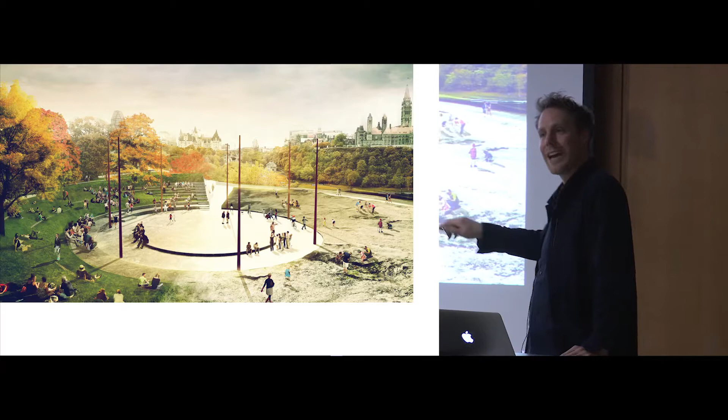Maybe I'll just stop there. Yeah, thanks.